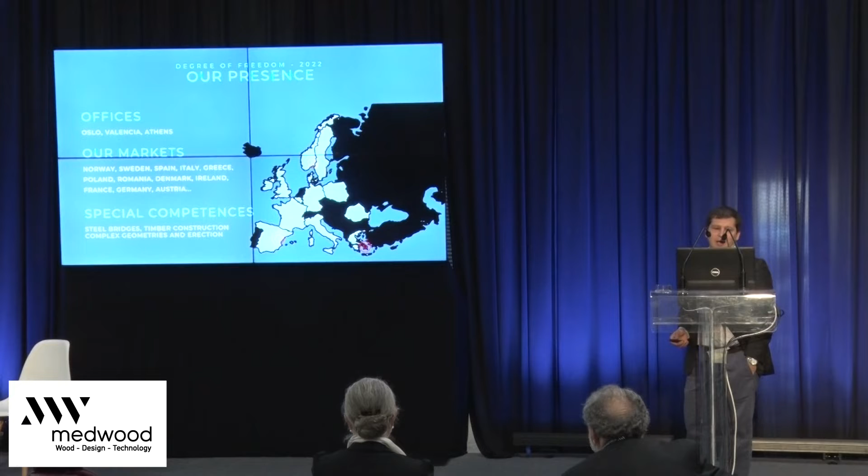We have a presence in Spain, in Norway, and here in Greece. We try to do engineering services wherever we can, of course, and in general in Europe we've been touching those countries you can see. And really our special competencies, I could mention, are steel bridges, timber construction, and complex geometries.

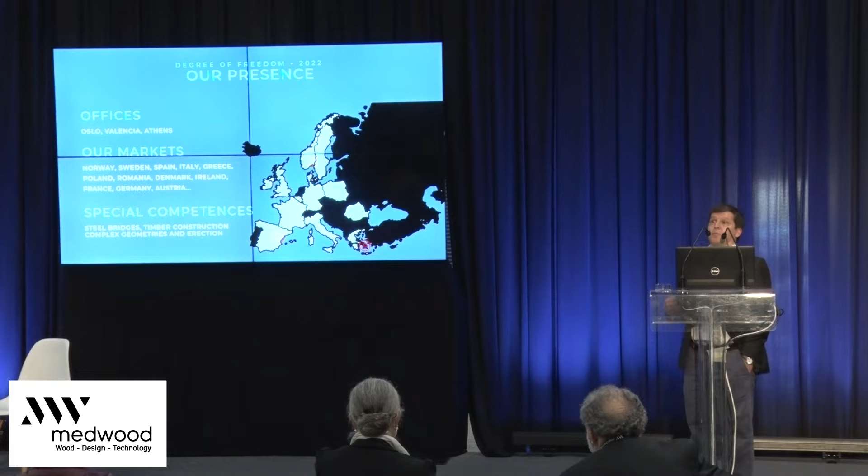The background of several of the people in our office comes from our previous experience in the Santiago Calatrava office. You probably know some of the works. I had the opportunity myself to work in this stadium that most of you certainly will know. We afterwards worked in other complex structures such as the World Trade Center. We worked in the Turning Torso in Malmo.

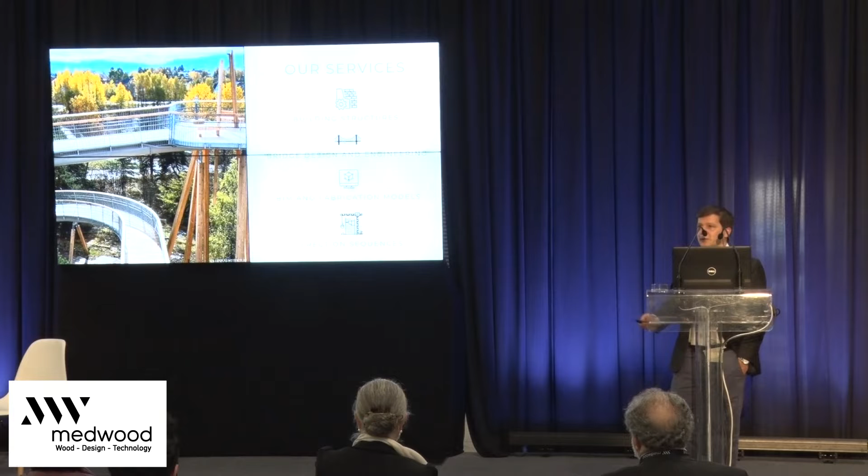We have been working in the City of Science since most of us are from Valencia, and we had the opportunity to work in that construction too, in the engineering, and some bridges in Reggio Emilia in Italy. So from that background, we had the chance to dive into complex geometries and projects that are international and complex also from the point of view of the organization of the works. Our services include building structures, bridge design, and also BIM and fabrication models, including erection sequence assessment.

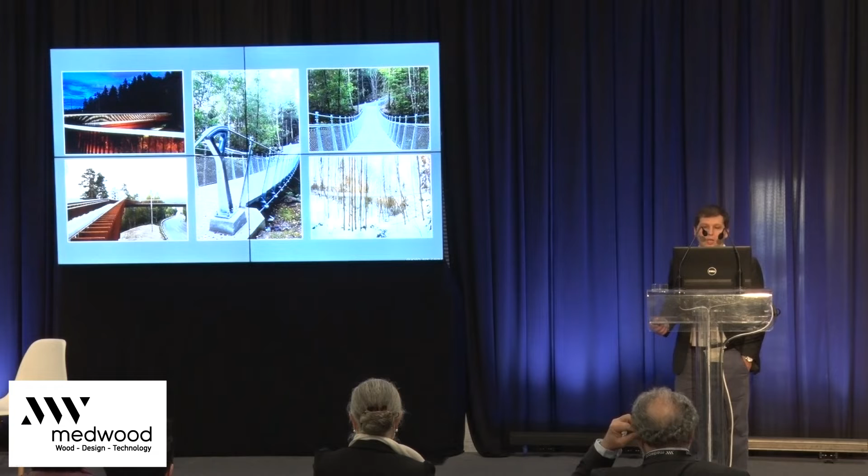Some of the bridges that we've done, you can see some pedestrian bridges in Norway. On the right side, the suspended bridge won an award in Norway, the best steel construction in 2018. This other bridge was done for Sweden, and we won another award, an architectural award of the area of Eskilstuna. Another pedestrian bridge in Drammen, a bridge in Norway, in Ørje, and our last bridge designed in the office that is going to be built just now. It was awarded to a contractor last month.

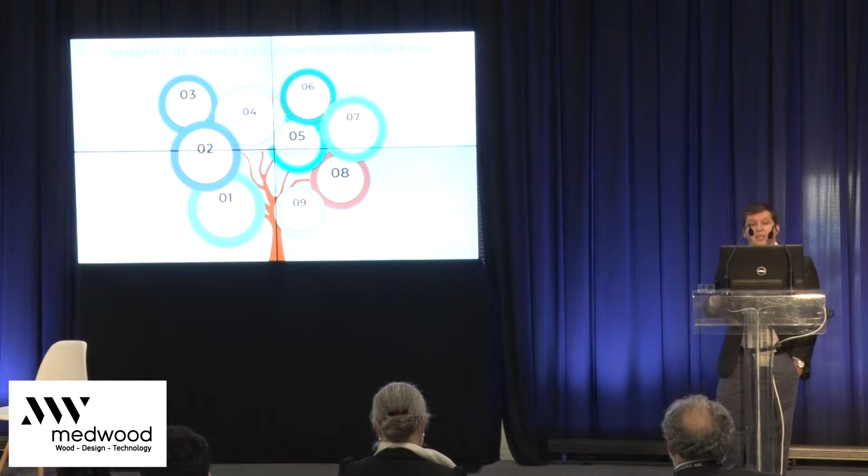But I came to speak about timber, and we also do some timber construction. So we love timber. I have liked a lot the previous presentations from my colleagues from the rest of Europe, and it is true that we think that timber is the future. We totally agree with you. Timber is renewable, recyclable, obviously. It has a low energy production. It is health and well-being, but also it has very good fire performance, very good sound absorption. It is a natural insulation, and in brief, it has all the advantages that the world we are moving in requests as a material for construction.

It's somehow amazing that it was always there, and we were inventing other materials while this has always been there. It is true that modern timber materials are not made only of solid timber, but mixed with other materials, and also glued, which is not that natural. But that being said, we strongly believe in the future of these technologies.

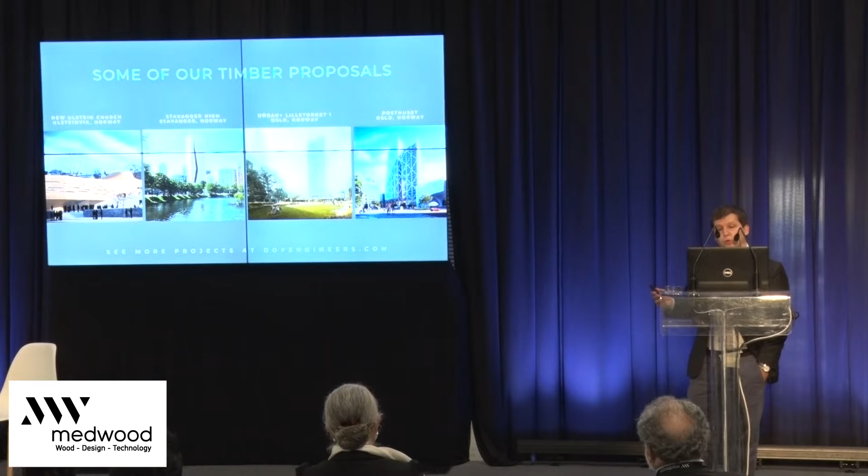Some of the designs that we had the chance to participate in in the past: the two designs on the left side are in collaboration with Snøhetta, and the other two with other architects in Norway, Saha in particular. All of them were competitions that we didn't win, so we cannot say that this will be in place someday, but they all needed more than 2,000 hours of engineering only in the competition, altogether. So we had a certain experience during competitions in the past, and now, recently, we have won our first one as a high-rise building in timber.

We are starting with the design, but I hope that we can proceed during the year with all the concept design, and in the coming years see that building happening. It's done with MAD architects and Bill Energy, and it's absolutely sustainable. The focus is on climate and social sustainability here.

It's a 98 meters high building with 29 floors. And of course, it will be the tallest timber hybrid in this case, not only concrete, not only timber, in Germany, if it finally is built in the coming years. Some views of the building.

It has been also mentioned today that timber can allow the current buildings in the cities to grow 1, 2, 3 stories more, which is also a potential need of the cities, because instead of building new buildings and enlarging the size of the cities, we can maybe complete the space within the cities where it is possible.

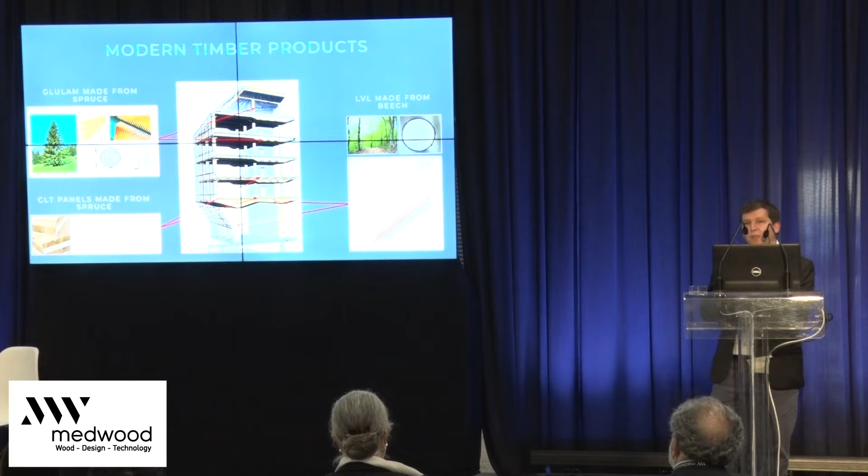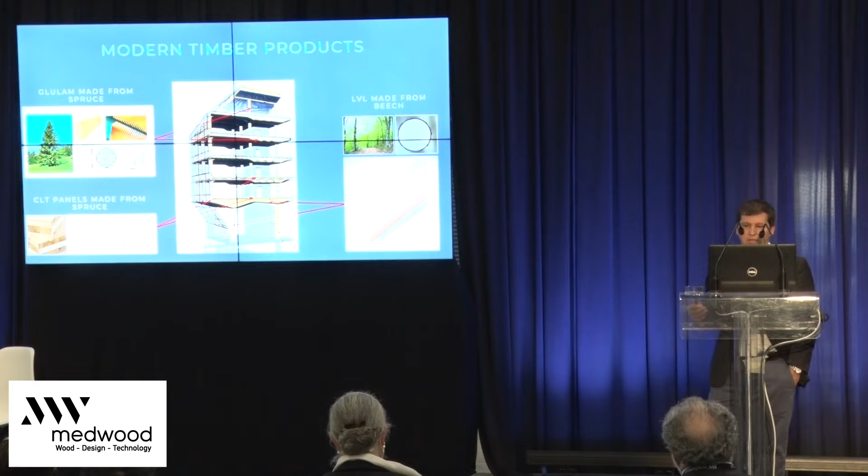In order to produce the LVL composite, we peel the tree instead of cutting some lamellas inside, and those carpets of timber are glued, and we reach with that a higher resistance, a higher resistance also to shear or rolling shear in the timber.

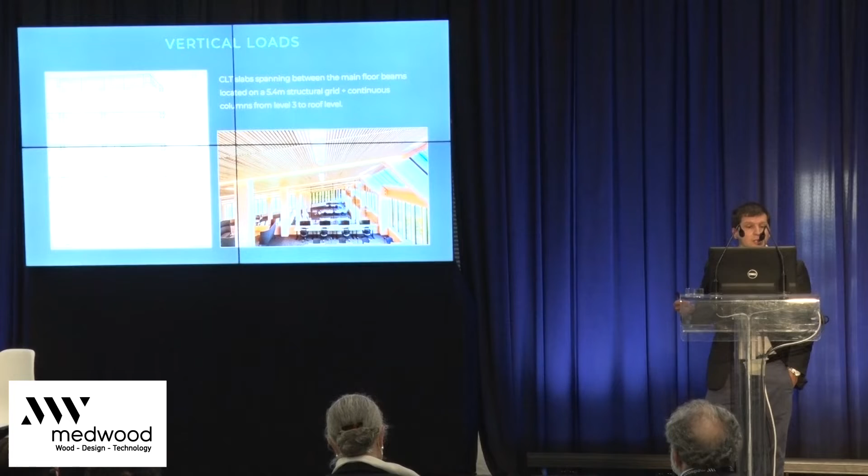So here you can see the vertical static concept with 2 floors, that public space that I was mentioning earlier, made of portals with 2 columns and a lintel, and on top of that a space with columns a bit closer that are continuous from this 2nd floor till the roof, continuous columns and pairs of beams bearing into recesses done in the columns. The frames are every 5.4 meters, and this is the span of the CLTs as floors.

The horizontal stability, as I've been speaking earlier, is provided essentially by the concrete cores, and all the flooring system made of CLT is acting as diaphragms that transfer all the wind loads in the areas far from the cores to the cores themselves.

In this type of buildings, and clearly in this one, we could check that a good modeling of the panels, a good selection of the position of the CLT panels, and good modeling of the joints between the CLT panels was essential to make an accurate estimate of the displacements due to winds, because the CLT slabs are not as stiff as a rigid concrete slab. So it is essential to have a good estimate of this flexibility in order to have accurate values of the displacements in the facades and provide that data to the facade manufacturers. So that is an experience that we got in this building.

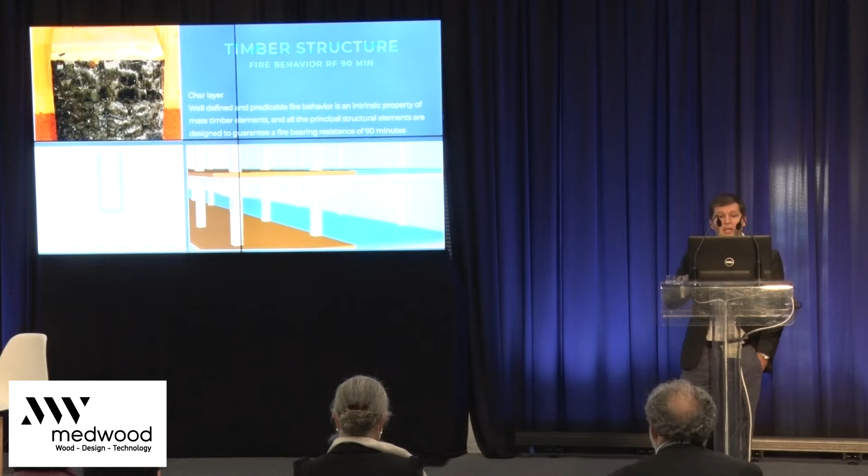The fire resistance has been mentioned, and I'm in agreement with that approach. Contrary to what someone could think, timber is not a material that burns immediately. Of course it can burn, but it's not burning immediately. So it is safer than steel on many occasions, and in this building we did some tests to check this 90 minutes resistance, and it was clear that the size of the carbonized thickness was within what was expected with this type of timber.

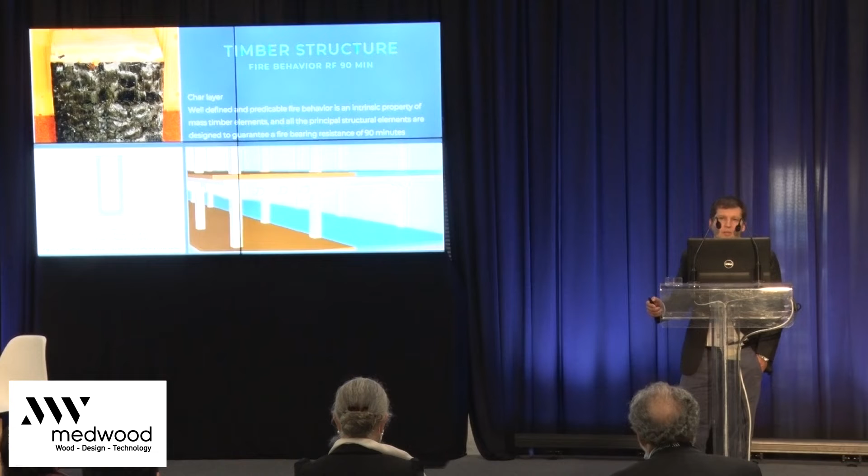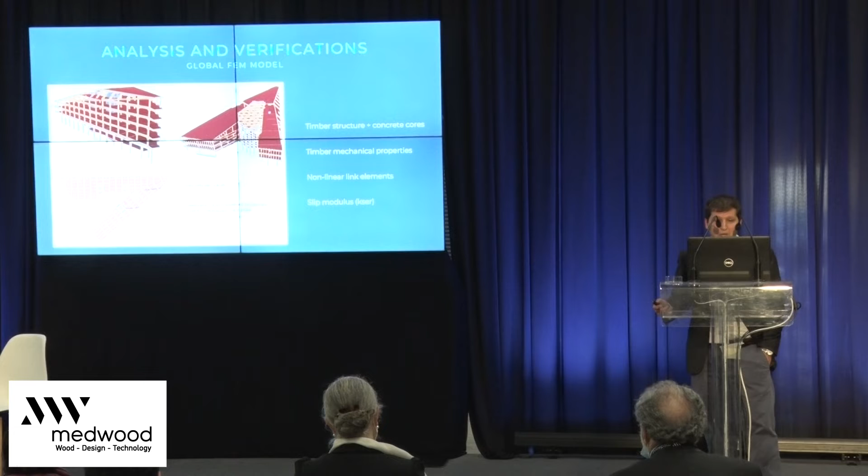In the finite element model that we developed, as I was just mentioning, it is important to have this slip modulus in all the connections, because the connections are going to slide a little bit, and this has an impact on the final movements of the building. We were using some non-linear links for that, and to be accurate in the timber mechanical characteristics. Several software do that relatively easily, so it's nothing really challenging today for an engineering office.

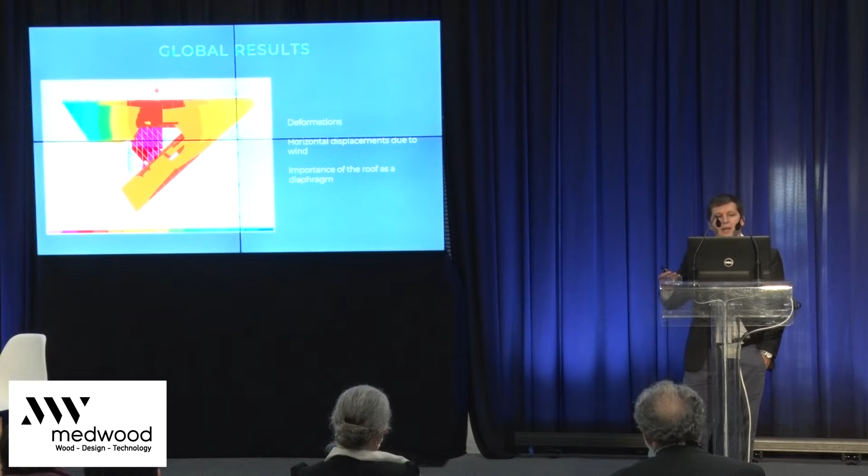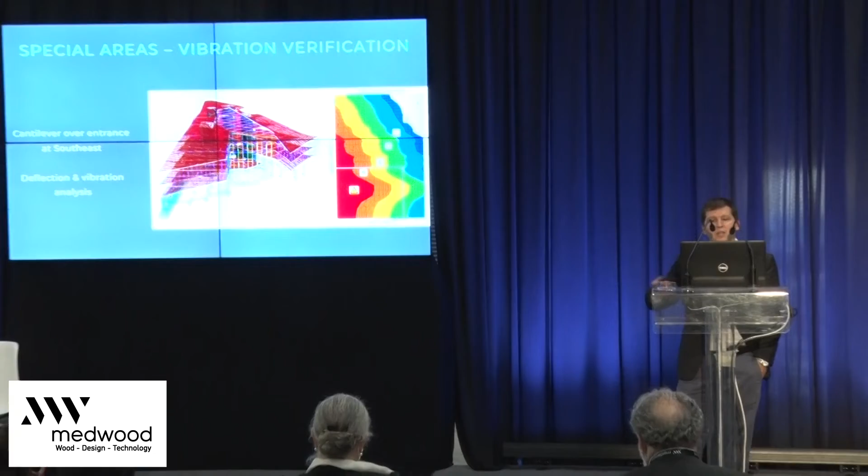The deformation under horizontal wind was clearly maximum at the farthest point from the cores, and you can see it in the blue area. And there we had these checks that need to be shared with the fabricators so that the facade could allow for those movements. We also made some comfort studies for some of the areas, because we got in this building some cantilevers for the vertical loads. At those areas we were checking the accelerations for a normal office use to be within what the regulations require. And another special area is the stairs, which you will see in some photos now.

The stairs are kind of sculptural elements in the atrium, and those stairs are made with this LVL timber, but curved in two directions. They have double curvature. And we did some tests, of course, in the finite element model to check that the walk on those stairs was going to be comfortable enough.

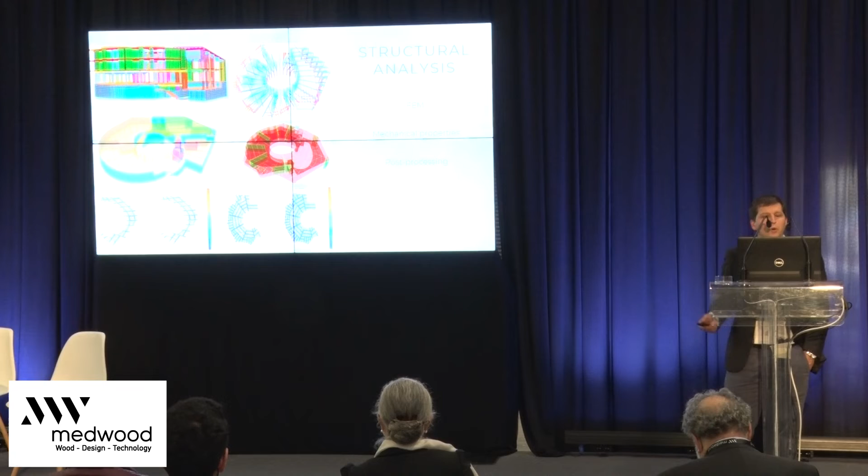We did here again our structural analysis, the finite element model, and that was done a bit later, and we took the opportunity to create our own post-processor for all the timber to timber and timber to concrete connections that we got in the building. This building has a core, the lift elevator, which is also made with timber. So below you can see some screenshots of the results that this post-processor made with MATLAB was showing.

So this is a collaboration with Dark Architects and with Betonmast. Betonmast is a contractor in Norway, and Betonmast was the client of all of us. The architect was Dark, but we were working for the contractor. So here we were also doing the model for the fabrication for the contractor. This is in Drammen, another city in the south of Oslo.

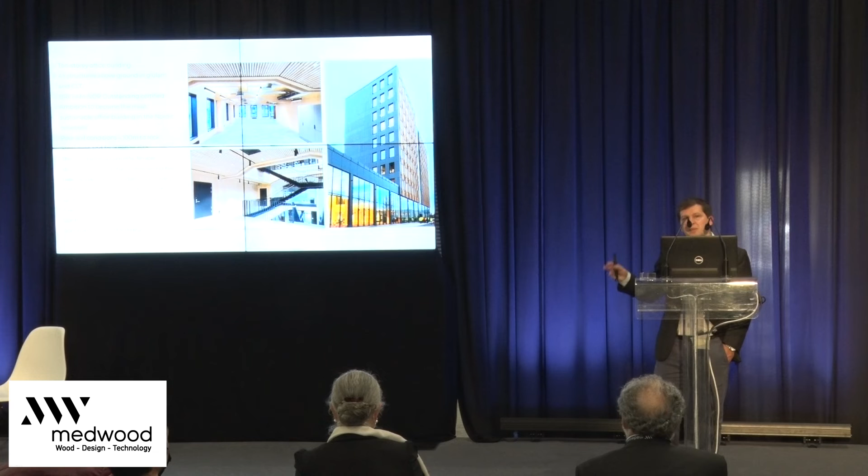So the building needed to weigh as little as possible in order not to have a huge foundation. And that's why we estimated several alternatives in the beginning, and we concluded that we could save around 1 million euros only by using timber in the structure instead of concrete or steel, or a combination of both. And that was one of the reasons that this project went on with timber.

But the building is there. The building is relatively simple when you compare it with the previous cases that I have shown, but still the nice thing for us was that it was the tallest we did, and it is still the tallest office building in Norway today. There are taller buildings in Norway, an 18-floor building, but this has another use.

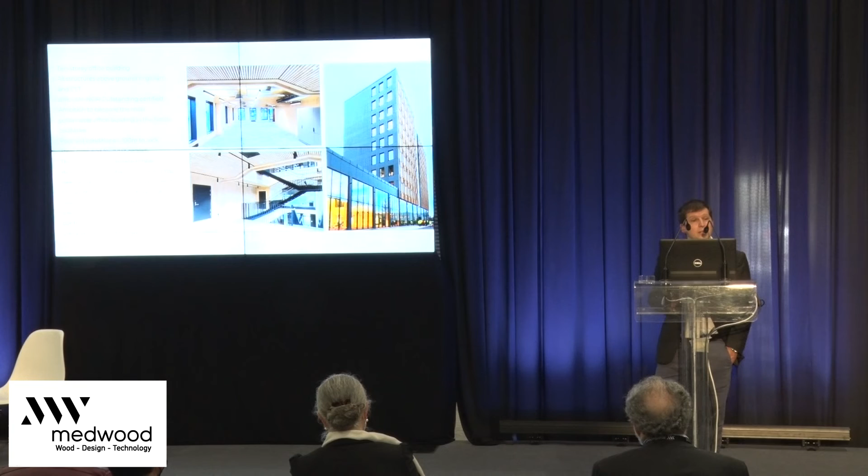And here we did a digital twin of the building that was used by Betonmast, the contractor, to compare what is on site with what should be, with the digital twin. They were scanning the reality every week and comparing it to the model. This was erected, 10 floors, in 15 weeks. So here I bring a case where, as was mentioned earlier, the fabrication was really fast, and in 1.5 weeks per floor, everything was done.

We also did a physical model of the building. This is what you can see here, the beam model that we performed, and 2 images of the timber physical model at a certain scale. I don't remember which one. And here we used CLT massively as a product. We were using, certainly for the floors, 200 millimeters thickness, if I'm not wrong,

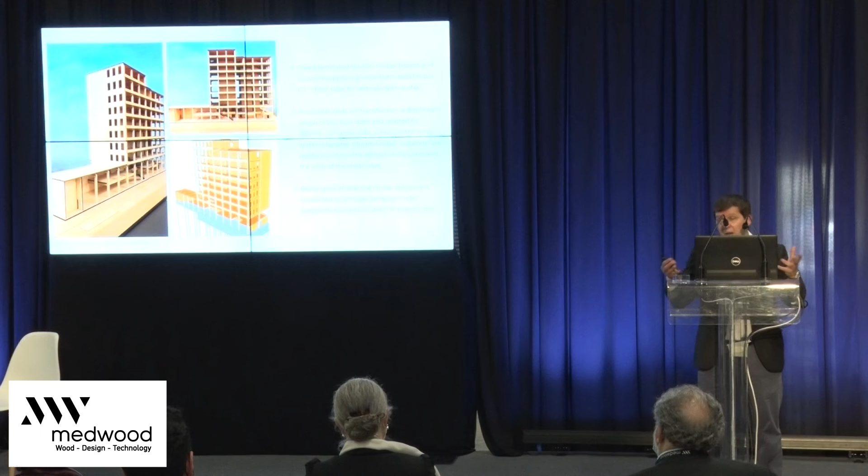and for the cores that are resisting all the horizontal forces, the cores are made with CLT of a thickness of 260 millimeters, connecting 4 glulam columns that strengthen the corners of the cores. All together connected, they make the box that is the central core. And around the cores, we have a series of glulam columns and beams that in turn support the CLT slabs.

This is another image of our model, the twin model I was mentioning. You can see on the blue image the holes for the pre-drilling of the screws, so we had that level of detailing. We were even positioning the holes of the screws that the machinery should drill in the shop, so that when they arrive on site, they already have the hole to put the screw, facilitating the connection. So we worked in a very close and good collaboration with Betonmast. The assembly drawings that we were producing were quite standard. And here are some details of the building.

The concept of the beam-to-column connection is similar to Sparebanken, the first project I was showing, but here a bit simpler, because the building is simpler overall. We have these double beams on top of recesses on the columns. Some other details where you can see the finishes, and the picture of the erection, how these columns are continuous and the beams are around them. Some images of the connections.